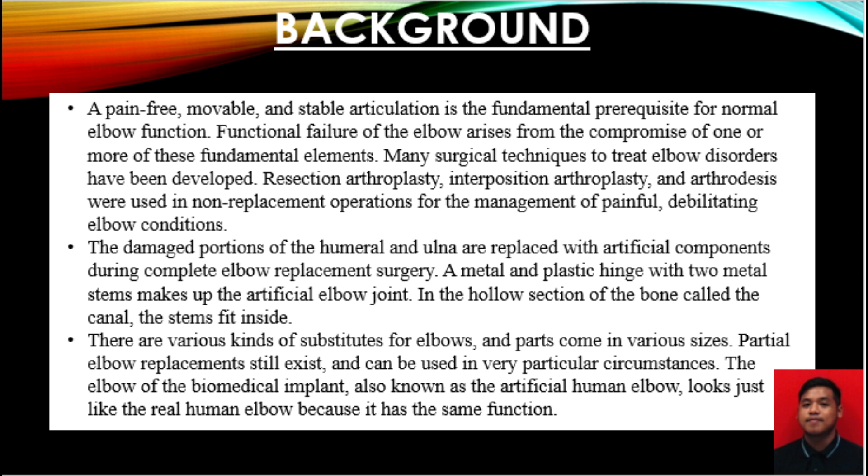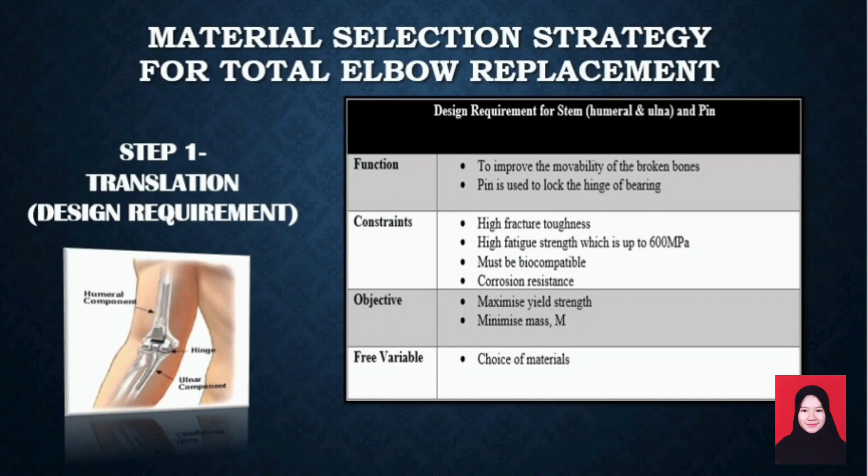For the first step, which is the translation step, the material for the stem must have high fatigue strength and high fracture toughness. Since this material is going to be used in surgical implants, it must be biocompatible with good corrosion resistance. The objective is to minimize mass and maximize yield strength. After determining the design requirements, the materials index is derived as shown in the slide and a bubble chart is created. The materials chosen are titanium alloy, commercially pure titanium, nickel-based superalloy, medium carbon steel and low alloy steel.

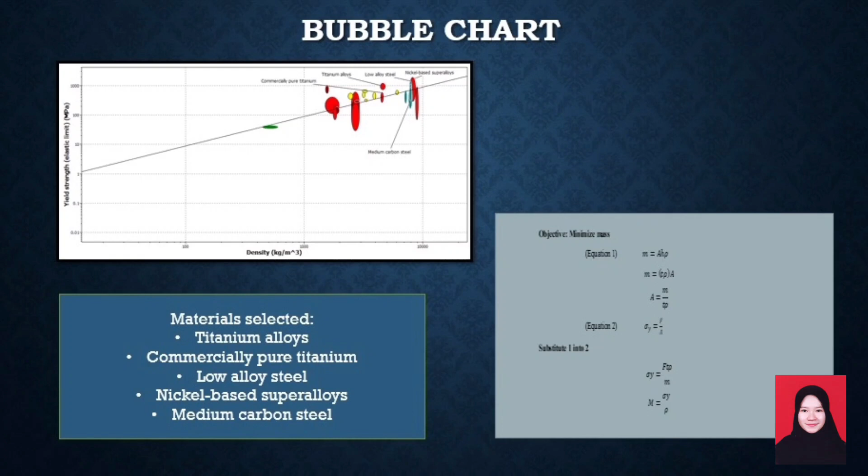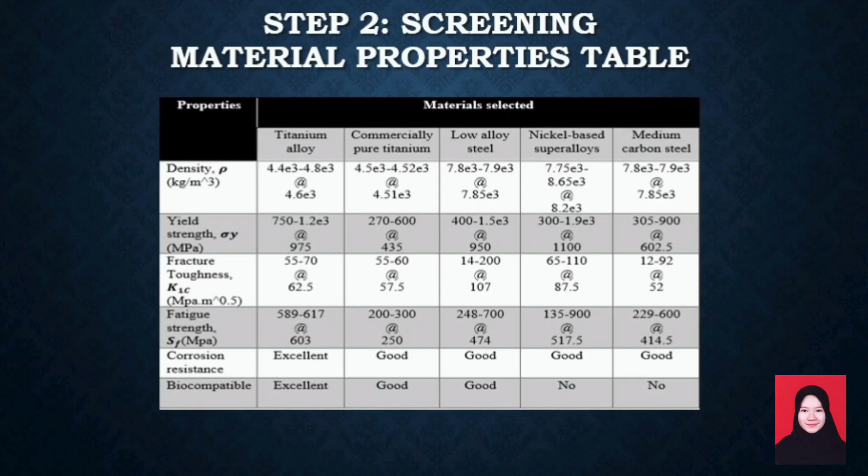The second step is the screening step. The material properties of each possible material are retrieved from CES software. Here are the properties of the 5 chosen materials. In this screening step, each of us screened the material using the constraints stated in the design requirement table. From the table, we conclude that nickel-based superalloy and medium carbon steel are eliminated because they are not biocompatible.

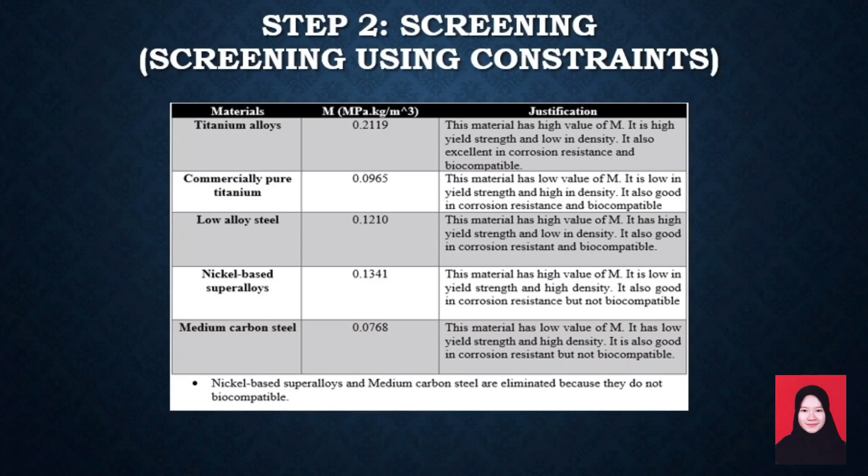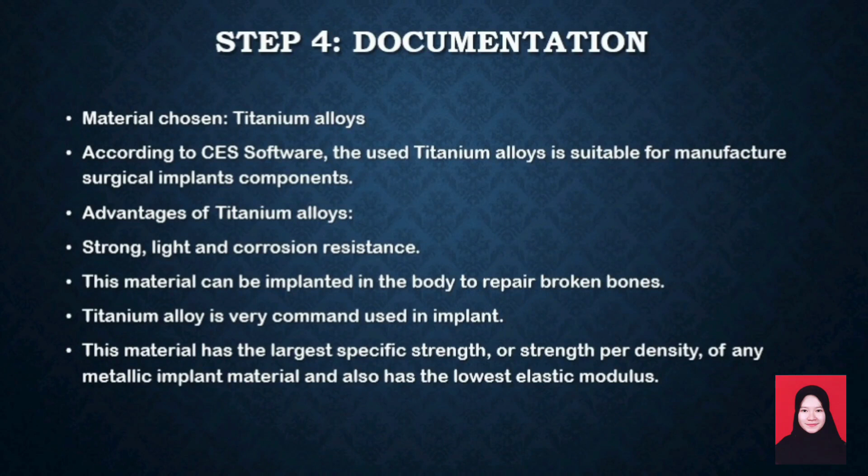According to CES software, titanium alloy is typically used for surgical implants and can be implanted in the body to repair broken bones. As for the bearing component, all 4 steps were also done and we conclude that polyethylene is the best material for the bearing.

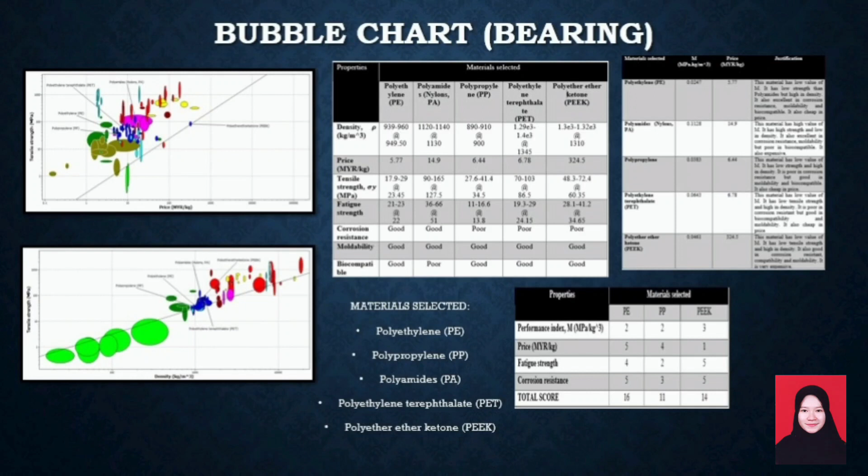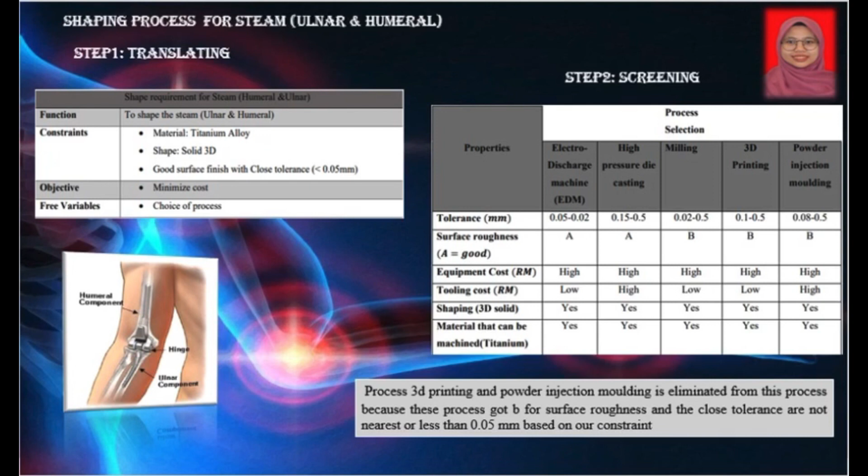For the second step, which is screening, select 5 machine processes regarding the constraints and objective from translating step 1. The results are obtained from the CES software. Based on the screening process, we eliminate 3D printing and powder injection molding because they are not good in surface finish with the close tolerance of 0.05 mm.

For the next step, which is ranking, after eliminating 2 machine processes, the remaining 3 machine processes are ranked to determine the best process for the ulna and humeral. The last step is documentation. Based on the ranking process, EDM is the best machine for the shaping process because EDM has a good surface finish with close tolerance of 0.05 mm and low cost.

In addition, EDM fulfills all the requirements in selecting the shaping part for the stem. Lastly, EDM is widely used in biomedical, orthopedic, and aerospace applications.

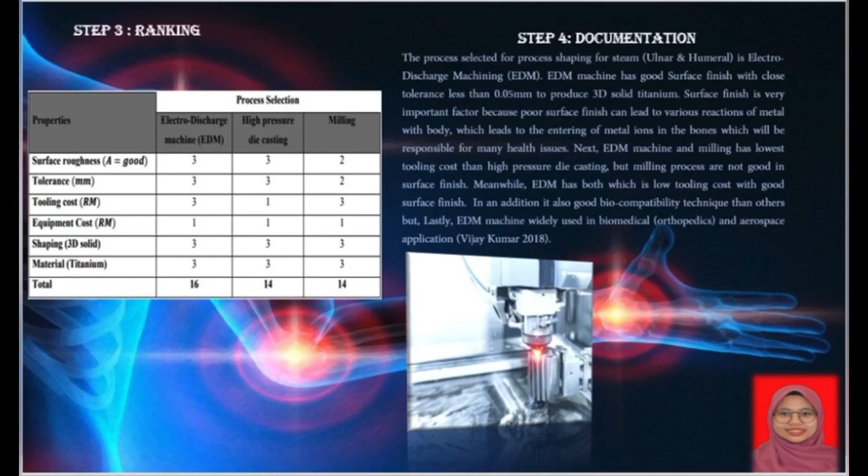So for now, I'm going to talk about the finishing and joining process for the stems. The function of the stems is to aid the broken elbow. The primary process of the stems is electrical discharge machining.

For constraint, the material is made by titanium alloy. The shape is 3D solid. It must be able to produce rough surface finish. The coating thickness range is 15 to 200 micrometer. It must be coating on certain surface area only. For objective, maximize surface porosity and minimize cost.

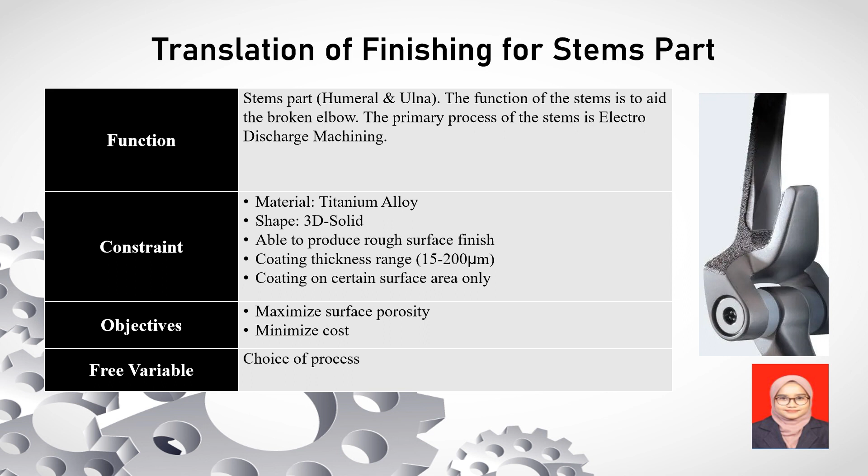Free variable choice of process. The process candidates are electroless plating, metal flame spray, anodizing, polymer powder coating, and vapor metallizing. All the data is collected from the CES software.

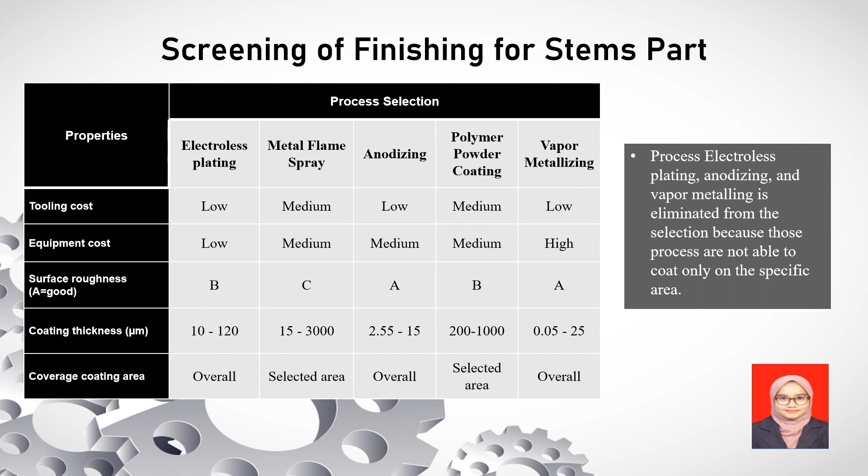Process electroless plating, anodizing, and vapor metallizing are eliminated from the selection because those processes are not able to coat only on the specific area. The chosen process is metal flame spray. It is because this process is suitable to create a porous surface finish on the top layer of the stems. The cost for metal flame spray is also medium. It is able to coat a thin layer of titanium alloy on the selected surface area of the stems.

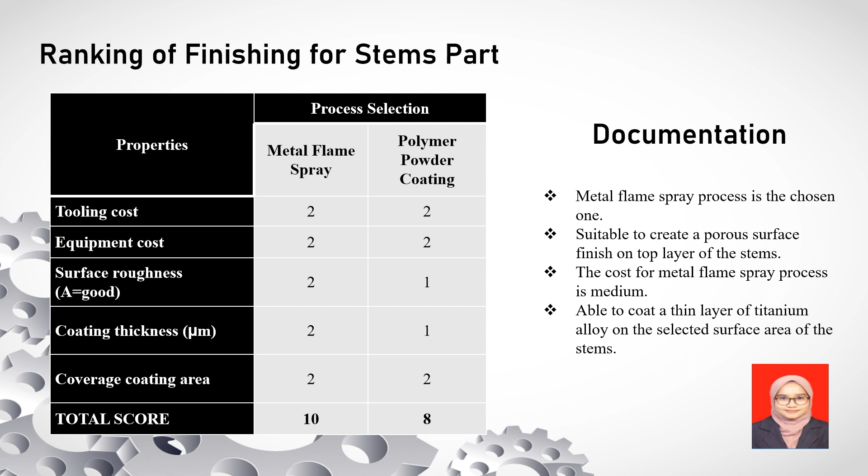Function to join 3 different components, which are the stems, polyethylene bearing, and 2 snap pins. Constraint: it is the combination of titanium alloy and polyethylene. The shape is 3D solid and prismatic circular. It must be able to stand tension stress from the stem. It must be easy to assemble and disassemble. The joint must allow rotational movement of the hinge and the stems.

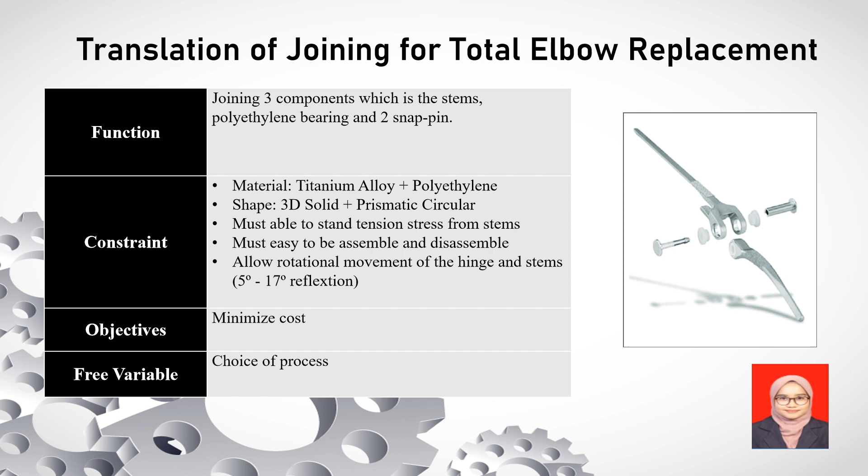Objective is minimize cost, and the free variable is choice of process. The process candidates are snap fit, threaded fastener, rigid adhesive, power beam welding, and rivet.

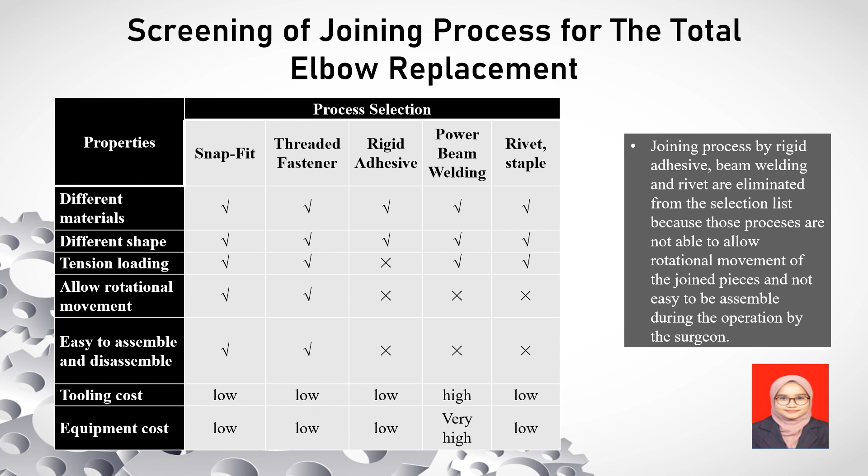After the screening process, the joining processes by rigid adhesive, beam welding, and rivet are eliminated from the selection list because those processes are not able to allow rotational movement of the joined pieces and are not easy to assemble during the operation by the surgeon.

Snap fit is the chosen one because this is a low-cost process. It is suitable for joining 2 different materials and shapes. It also is able to support tension loading. It allows rotational movement and is easy to assemble and disassemble.

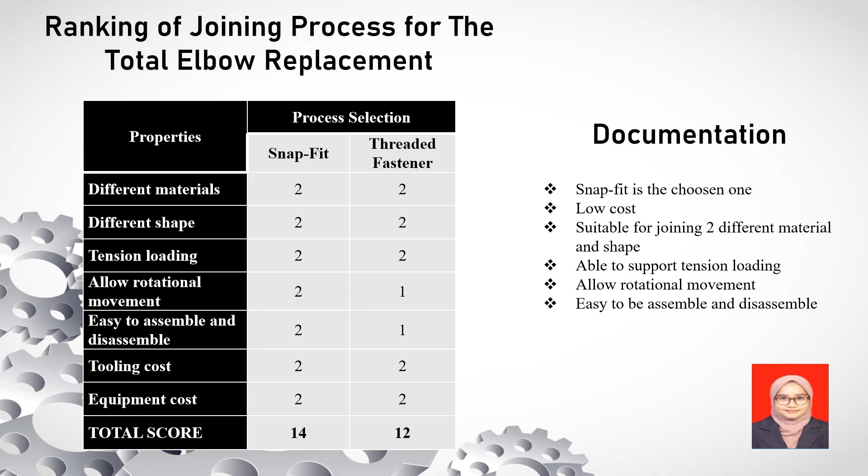Today I'm going to talk about processing parameters. The process involved is electro discharge machine (EDM). The effect is EDM will make the surface rough when the pulse current is at maximum, while pulse on time will cause erosion of the product. The spark frequency will decrease the surface roughness of the product.

Then the process is metal spray. The effect is the distance between the spray gun and the product will affect the coating thickness, which will affect the surface roughness. The heat needs to be controlled so that the coating will be perfect.

The other process is compression molding. The effect is both pressure and heat will make the molding effective to produce our product. The cooling rate will produce a good stress-reduced molded part.

Next is the snap fit process. The effect is elastic modulus will make sure the product is resistant to deform elastically when the force is applied.

Then the sheet forming process. Its effect is the thickness of the sheet metal will affect the product, and deformation will occur such as crack and fold. The punching tonnage will reduce the deformation on the product.

And the last process is vapor metallizing (PVD). The effect is the oxidation state will prevent the product from rusting.

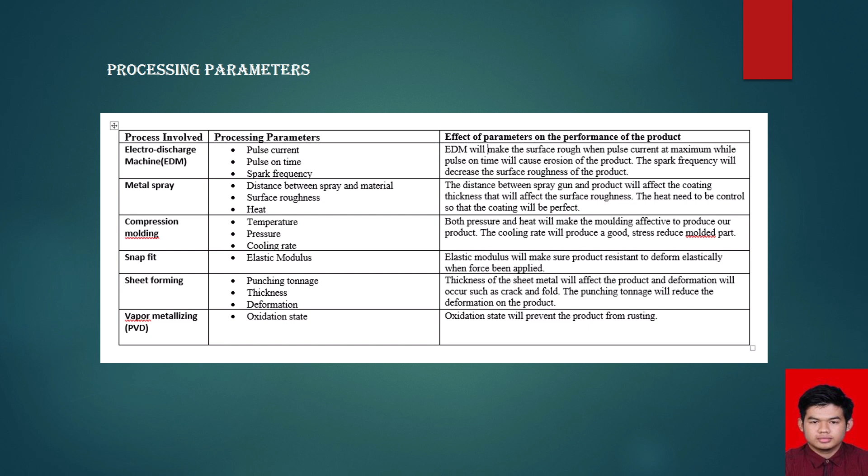Shaping process for the humeral and ulnar part is electro discharge machine (EDM). EDM uses electric spark as a cutting tool to cut the workpiece and finish until the desired shape. The workpiece will be put in dielectric fluid, then the power supply will generate rapid electric pulses that create a discharge. The discharge will create plasma causing the melting and evaporation of material.

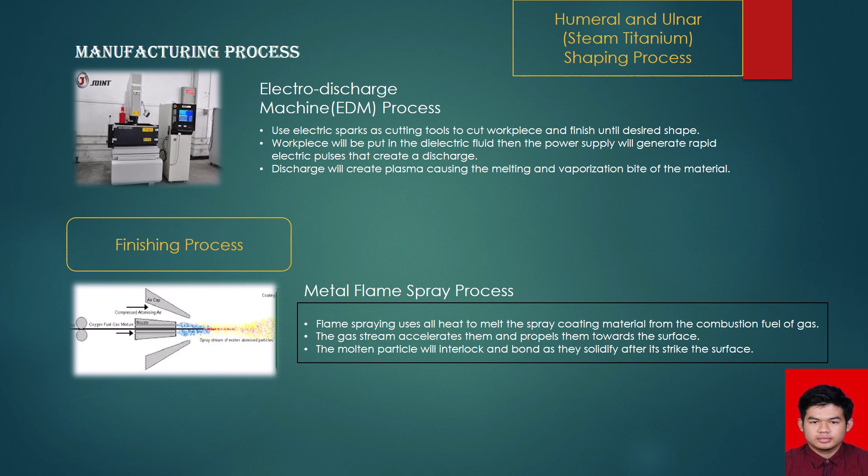For the finishing process, we use the metal flame spray process. Flame spraying uses heat to melt the spray coating material from the combustion of fuel gas. The gas stream accelerates the particles and propels them toward the surface. The molten particles will interlock and bond as they solidify after striking the surface.

For the bearing shaping process, we use the compression molding process. Compression molding is a process of molding the material. Generally, the material is preheated before being put in the heated mold cavity. The mold is closed with the top of the mold, and high pressure is applied to force the material to fill the mold area. The heat and pressure are kept maintained until the molding material has cured.

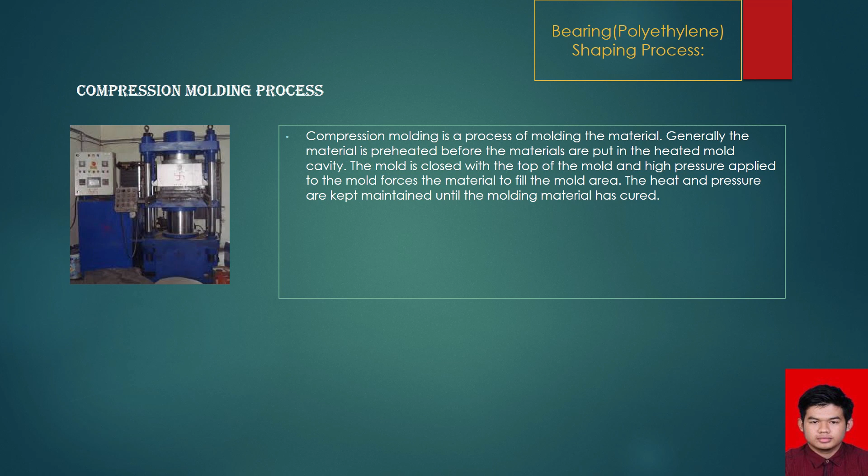The next process is snap fit joining. Snap fit is a process that doesn't involve any heat, forging, or welding like other mechanical joining. It's just like mechanical fastening. The joining process is very fast, and at the same time it's cheap. The best part of the joining process is all the parts interlock with each other by pushing some part to attach them. This advantage can make the parts joint fit safely.

This joint was selected for this process because the snap fit process can join different materials, colors and textures. This process can attach the humeral and ulna, which is titanium, and the bearing, which is polyethylene. In this process, the bearing is pushed into the lock and fit to the humeral and ulna.

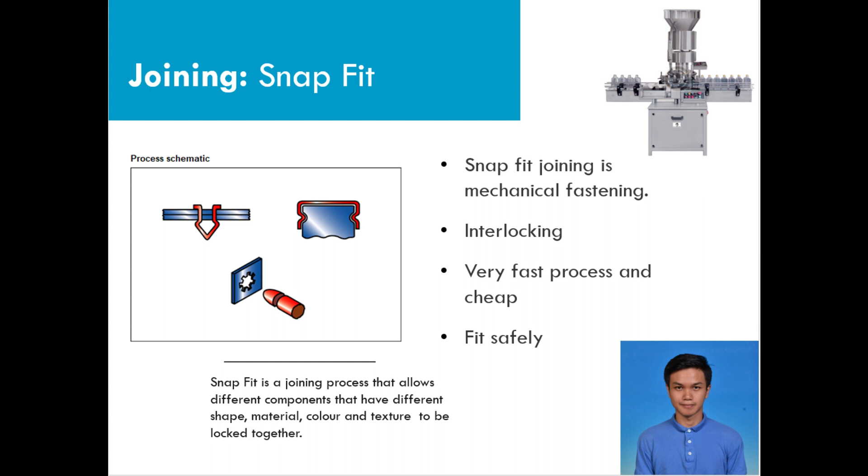The next part is hinge pin. The hinge pin is a component used to connect the humeral and ulna, and it has been attached with bearing. Hinge pin was selected because the component can join two parts together while allowing the part to move freely. The best material to make hinge pin is titanium.

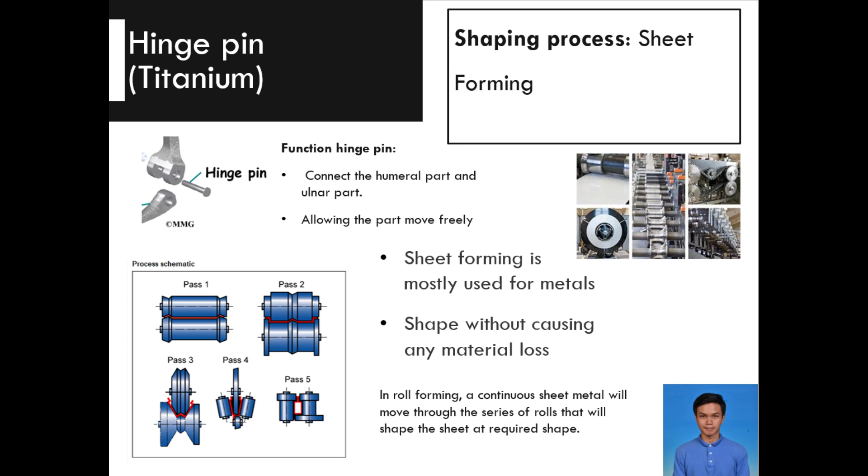We move to the primary process for the hinge pin, which is sheet forming. Sheet forming applies force to a piece of metal to change its shape without causing material loss. It starts with material stock, giving the product an almost constant cross-section unless folded. Press forming covers a range of sheet forming processes that use a die and press the sheet to get the required shape. In roll forming, a continuous sheet metal moves through a series of rolls that shape the sheet to the required form. This step is perfect for long length, constant, and sometimes complex cross-sections.

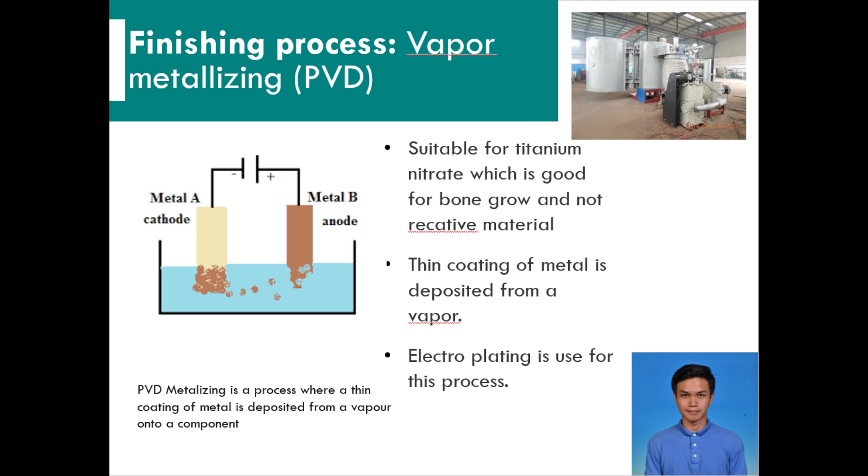Next, the finishing process for the hinge pin is vapor metallizing, the PVD process. This process is suitable for titanium nitride to coat the hinge pin, which is titanium. Titanium nitride is good for bone growth and is a non-reactive material, which makes it safe. PVD metallizing is a process where a thin coating of metal is deposited from a vapor onto a component. The vapor is created in a vacuum chamber by direct heating or electron beam heating on the metal, and condensation occurs on the cold component.

Hi, my name is Muhammad Haqim and I would like to continue my group presentation about the effect of parameters for humeral and ulnar implant.

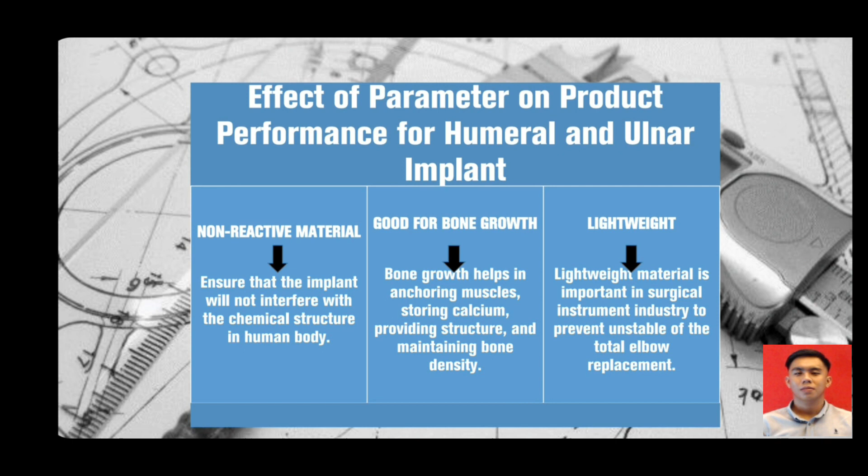There are three effects of parameters: first, non-reactive material, ensuring the implant will not interfere with the chemical structure in the human body. Second, good for bone growth, which helps in anchoring muscle, storing calcium, providing structure, and maintaining bone density. Third, lightweight material, which is important in the surgical instrument industry to prevent instability of the total elbow replacement.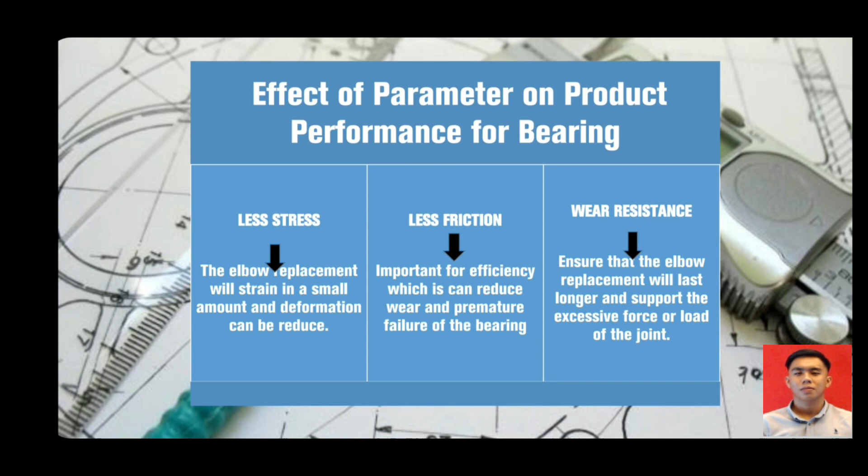Effect of parameter for bearing: first, less stress, so the elbow replacement will strain in a small amount and deformation can be reduced. Second, less friction, which is important for efficiency and can reduce wear and premature failure of the bearing. Third, wear resistant, ensuring the elbow replacement will last longer and support the excessive force or load of the joint.

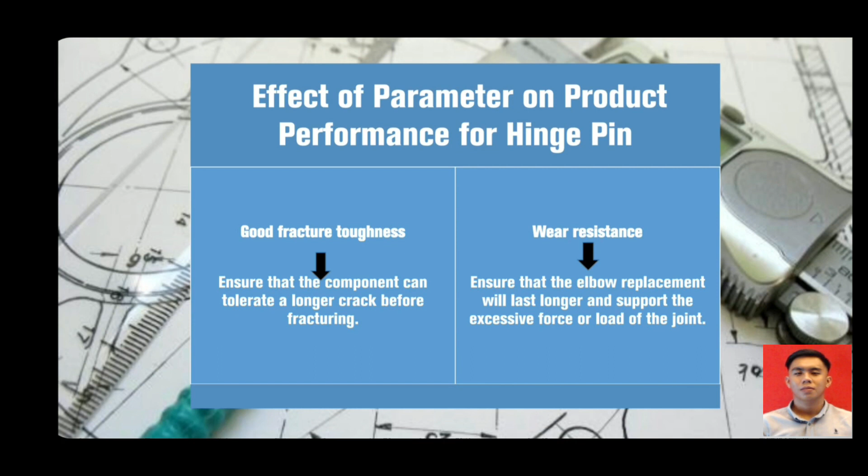Effect of parameter for hinge pin: first, good fracture toughness, ensuring the component can tolerate a longer crack before fracturing. Second, wear resistant, ensuring the elbow replacement will last longer and support the excessive force or load of the joint.

For testing and quality control, there are 6 methods of quality control: durability test, surgical process, bone resorption, triceps-sparing, stability, and humeral stem.

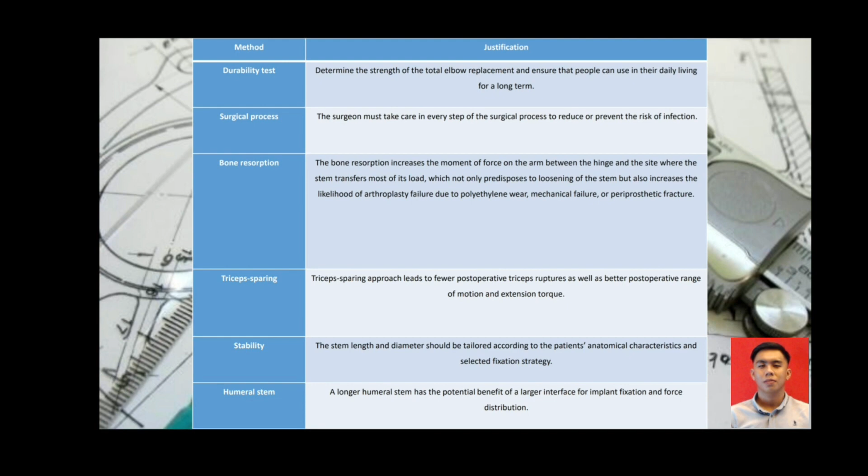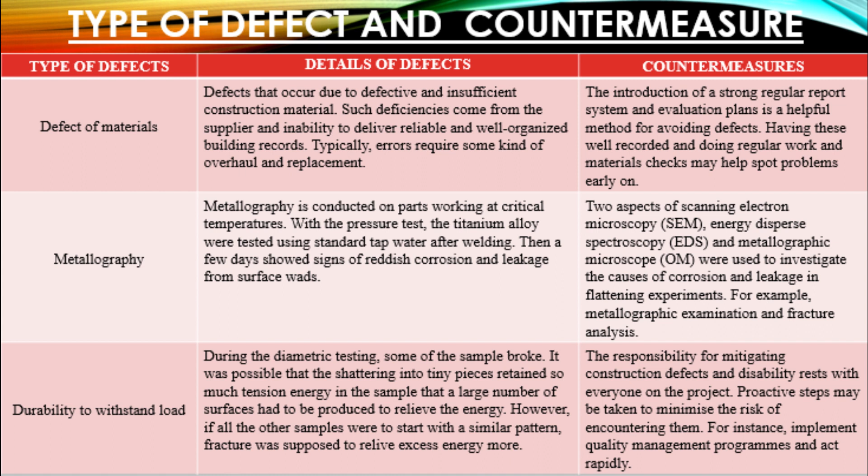As a conclusion, while replacement of the total elbow is much less common than replacement of the knee or hip, it is just as effective in relieving joint pain and restoring individuals to activities they enjoy. Replacement elbows include stems and hinges. The stem is for the replacement of the straight bone, and the hinge is for the elbow's rotational movement.

Various material and process selection techniques have been carried out for the humeral, ulna and hinge of the elbow replacement, each precisely focused on function and other criteria such as goals and constraints. The material chosen to produce the humeral, ulna and hinge component is titanium alloy. While the material is the same for both components of the elbow replacement, different manufacturing methods can produce them: the humeral and ulna are produced using electrodischarge machining (EDM), while the hinge is produced using sheet forming.